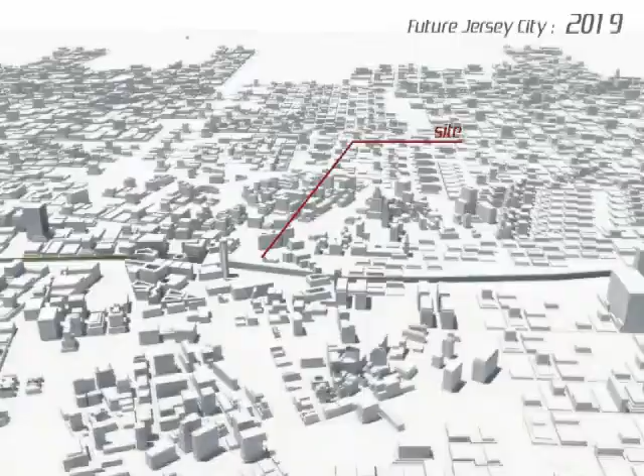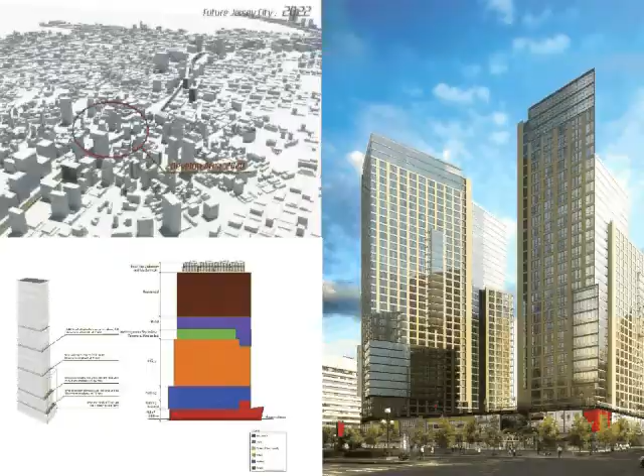Jersey City, one of the state's fastest growing cities, is developing its own impressive skyline and economic engine. Also, rehabilitation efforts have already begun and are being led by the Journal Square Restoration Corporation and the Jersey City Economic Development Corporation. From 2030, near Journal Square area will be filled with massive buildings, except above the railroad.

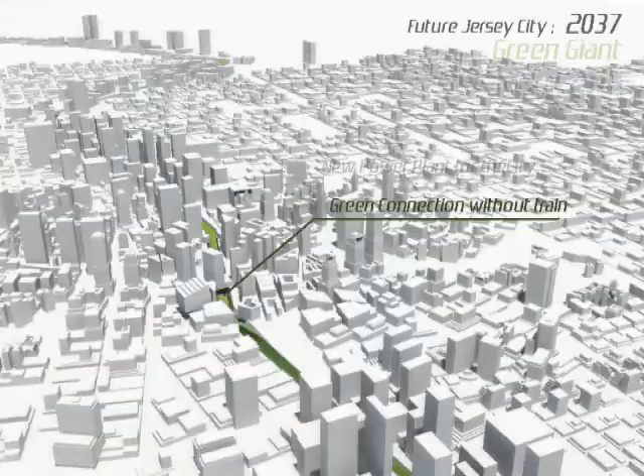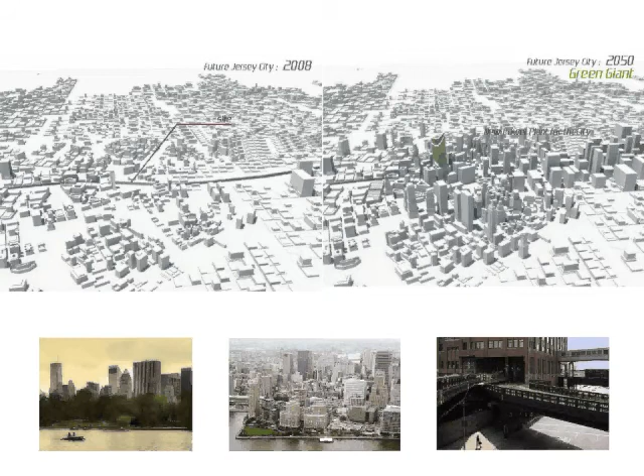The trains will be replaced with air devices, so we propose redesigning the railroad space like the High Line in New York City. We can generate not only a place which can be occupied by tenants, but also energy supporting green connections between cities.

As we have shown on our adaptive matrix, tree is the most optimized system for self-sustainability. Our initial approach and design process was literally to make the building a tree. Through pixelizing the tree into various scales, we were able to achieve a different color configuration.

By mixing these different conditions, we were able to come up with the logic that structures our power plant. The small pixel would maintain close relation to natural systems, such as solar collection, vertical farming, water collection, and so on. Large-scale modules, which further diminish from the natural system, would be the location of the mechanical systems that allow for the building to collect energy mechanically from nature.

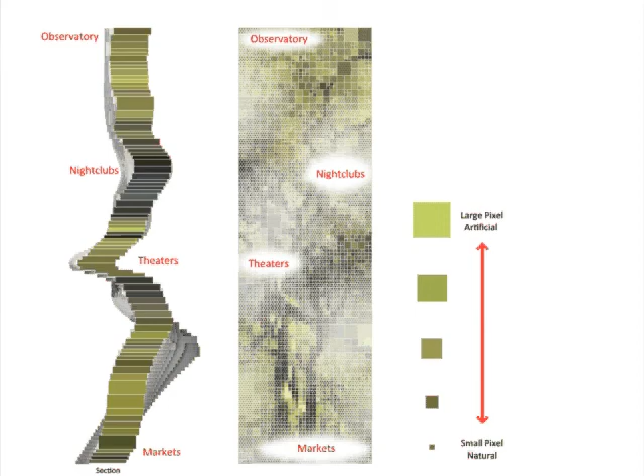The section of the building would maintain its depth and slide on top of one another. These compartmentalized flexible systems would allow for the building to adapt to and optimize its function according to the climatic conditions. Also, the flexibility would allow for the portion of the tower to accommodate social programs that would allow for the power plant to adapt and create both contextual and social relations.

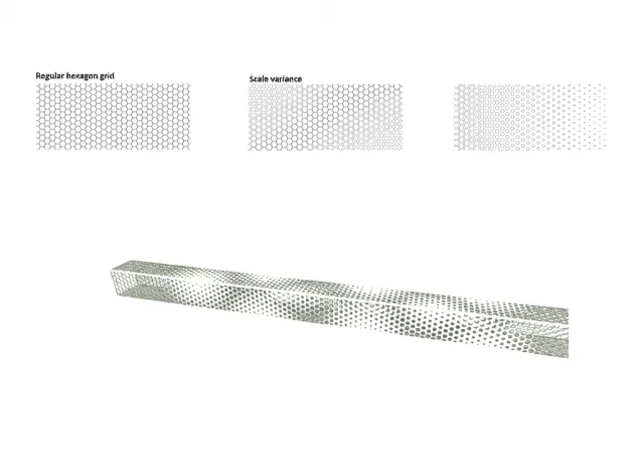Complex organization of power plant systems, residence, and sky garden - the project demanded an additional logic to make its coherence with the internal and external relations.

In order to allow the power plant to have both structural stability and absorb the natural energy, we have developed a skin system that changes its opening and density of its enclosure. The hexagon grid with the scale change allows the units and the building to have surface conditions that react to the programmatic demands.

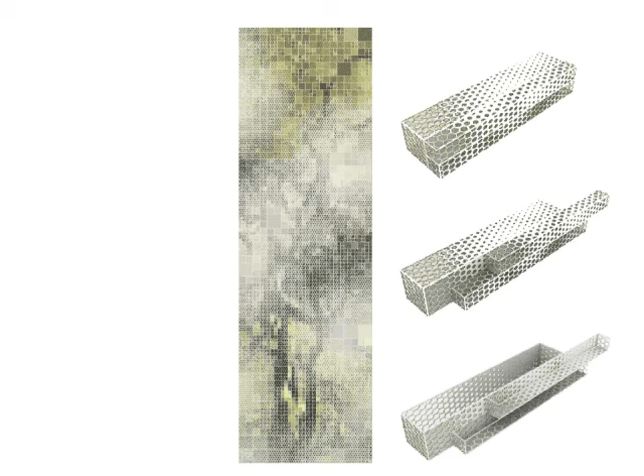Large hexagons would form a performance density along the units and surface conditions that demands for maximized solar gain and connection to nature. Also, the large hexagon units would allow for access for the public within the building, which becomes an opening for the sky garden, the residence, and public areas within the building.

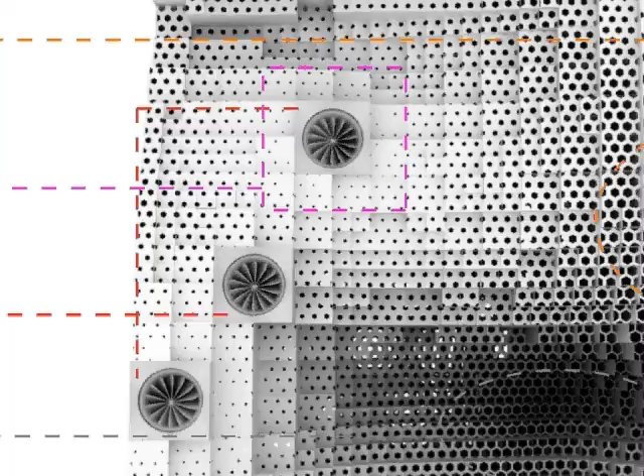Small hexagon units would not only build a solid surface on the unit, but also allow for a series of conformations of the surface conditions that could become the wind scoop or other functional relationships to its internal programmatic functions. For example, the solid surface conditions in this diagram would allow for the wind to channel into the wind turbine, and also to have functions such as storage or mechanical systems that demand to be protected from external conditions.

Next is a strategy to reconnect and adapt the power plant to the dense urban conditions. The power plant, which is intended to supply the neighboring buildings and the city with energy and resources, would demand a system that absorbs and distributes sources efficiently.

Flexible tubical core systems placed on the exterior of the building would directly plug into the surrounding buildings and provide them with the sources. Also, the core would meet with the city's main power lines to distribute its collected energy and sources throughout the city.

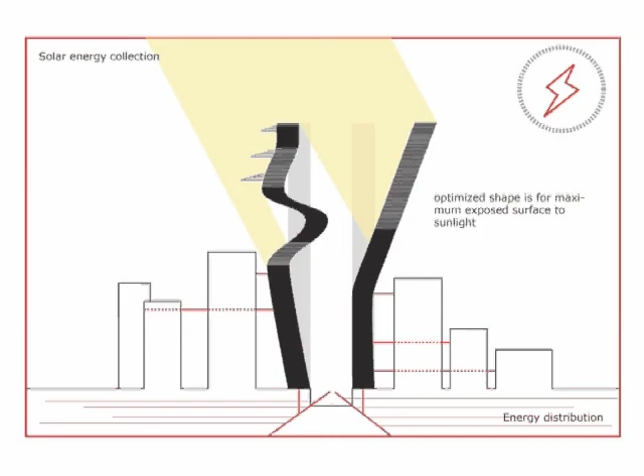With Jersey City changing to high density, it demands higher energy, agricultural production, water, and oxygen to meet the increasing demands. Flexibility of the tower allows the power plant to change and adapt to environmental conditions to optimize its performance.

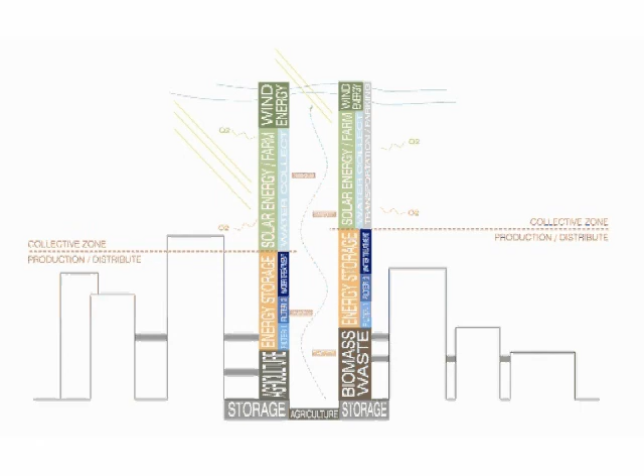GreenGiant, placed in the heart of the urban context, will not only provide energy, but also generate various social programs within to adapt to its urban context.